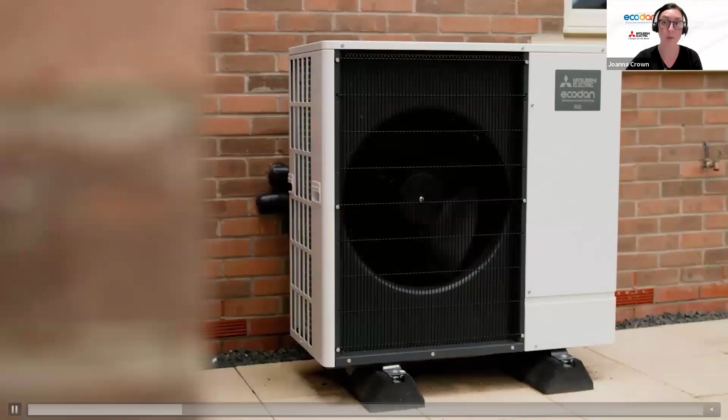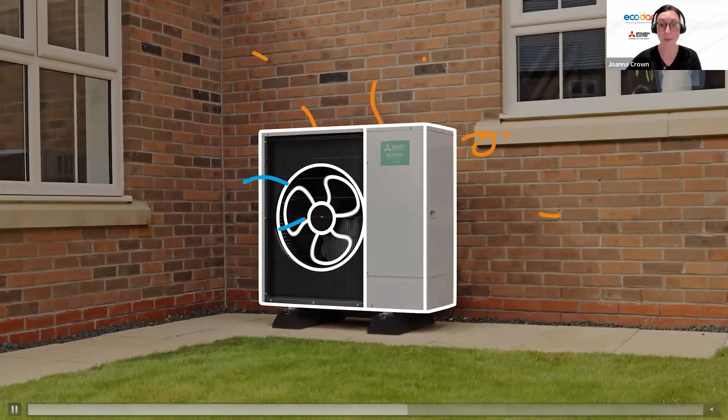This is a Mitsubishi Electric air source heat pump. The outdoor unit is typically located against an exterior wall of your home and only needs electricity and water connections to work. The outside air contains heat energy even when temperatures are super, super cold. The outside air is drawn into the back of the unit, by an electric fan where the heat energy is absorbed into a heat exchanger. Once absorbed, this heat energy is passed into your home to provide heating and hot water.

Once you have decided that you would like a heat pump, we have two excellent tools available for you to use. Firstly, the Find My Ecodan. You answer some simple questions about your home, and it will suggest the most suitable heat pump for you. It will also link you through to finding your local installer to contact for a survey and a quote, so for next steps. And if you also wanted to see what that heat pump looks like outside of your home, you can download our brand new augmented reality app, follow the instructions, and you will be able to see what that looks like outside your home, if you want to download it this evening.

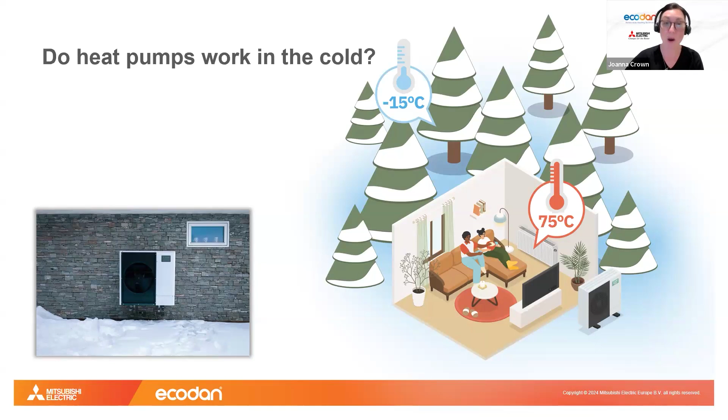Okay, a couple of common questions we get. Firstly, does it work in the cold? And the definite answer is yes. Our heat pumps will warm your radiators with a 75-degree flow temperature whilst it's -15 outside. All of our units actually work right the way down to -25. That photograph is Norway, just to prove that it does work in very, very cold climates. And I think Dunbartonshire's temperature lows for your area are around -8, so well within our heat pump operating range - you will have no concerns.

And the other question we get a lot is, are they noisy? No, not at all. Our units a metre away are just 40 decibels, and that is the sound of a library, so you will not hear them at all.

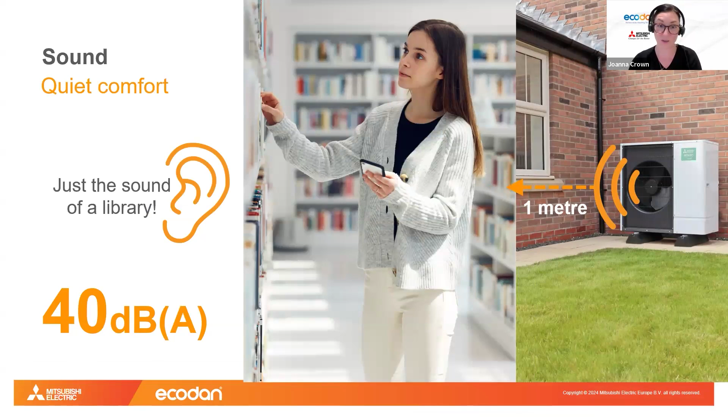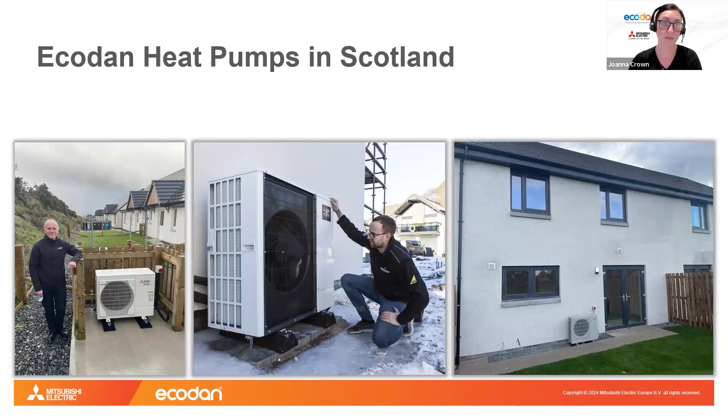And just to finish off, some examples of our Ecodan heat pumps in Scotland. I think the outside photos there are actually in the Hebrides, again, just to prove the point that they work in much colder climates as well.

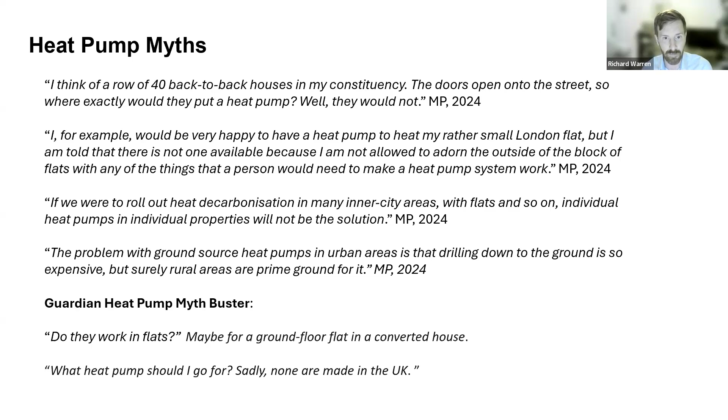So probably the easiest thing for me is to show a couple of examples of what we've done. But very briefly, Kensa - and I'm happy to say more and more companies are looking at this option - I came up with a process for putting ground source heat pumps into lots of properties all at the same time, going back about a decade.

It works fundamentally the same way that if you put a ground source heat pump in your own garden, you'd have a big borehole going down somewhere between 100 and 200 meters, and that would be your own borehole. The problem is it costs quite a lot of money up front, and most people don't necessarily want to pay that. Also, what we really want to do is put it into smaller properties where you don't have your own garden or that space.

So the concept of what we call networked heat pumps is, instead of having it in your garden, you'd have the boreholes in the car park around some flats, or in the street, for example in a row of terraced houses. Those boreholes go in the ground, but they wouldn't be your own boreholes - they'd be put in by a company like Kensa, and all of those boreholes would be connected together. Effectively, they'd be shared amongst all the flats or all the terraced houses, and they would all draw heat from the ground for you to use with your own ground source heat pump in your airing cupboard or the cupboard under the sink.

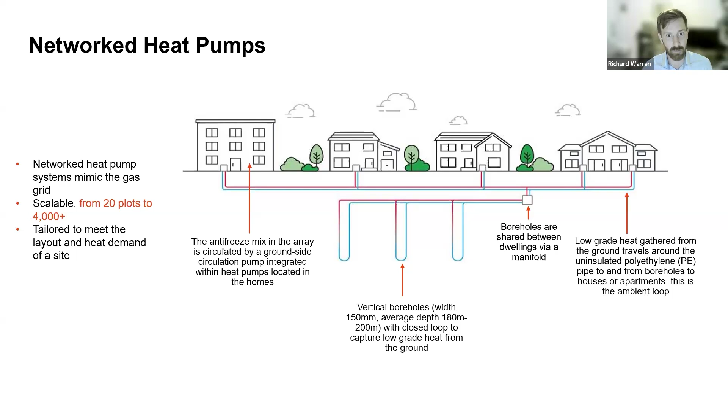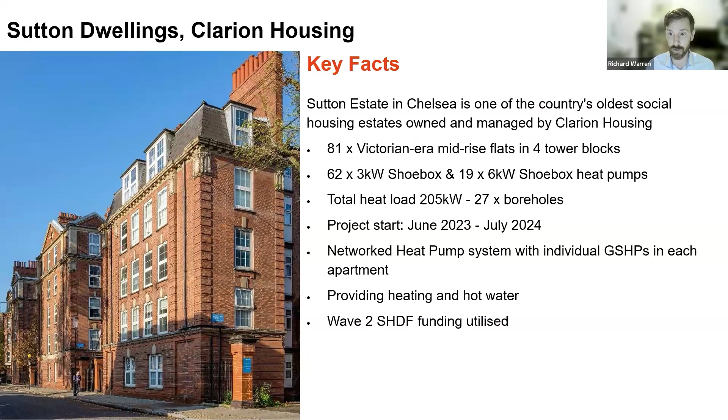So, a couple of examples where we've done this. The first one was Sutton Dwellings, owned and run by Clarion Housing, a housing association with properties all over the country. This one's right in the middle of Westminster, in Chelsea, and it's interesting because it busts a lot of myths. Firstly, we're putting ground source heat pumps into blocks of flats - we've done 81 flats, all with their own ground source heat pump providing heating and hot water. Secondly, these are some of the oldest social housing in the country, built just before the First World War, so we're busting the myth that you can't put a heat pump into historical properties.

The second example is slightly newer social housing - just over 270 flats in Thurrock, Essex, which we completed about a year ago. This shows you can have ground source heat pumps in blocks of flats with 10 stories, and these were really space constrained - a lot of them were even studio flats.

We're able to demonstrate a combination of a small ground source heat pump, which we call the shoebox. It's a little bit bigger than a shoebox, probably about the size of a large microwave. We're putting these ground source heat pumps in combined with a heat battery that allows you, even in a studio flat on the 10th floor of a block of flats, to have a ground source heat pump.

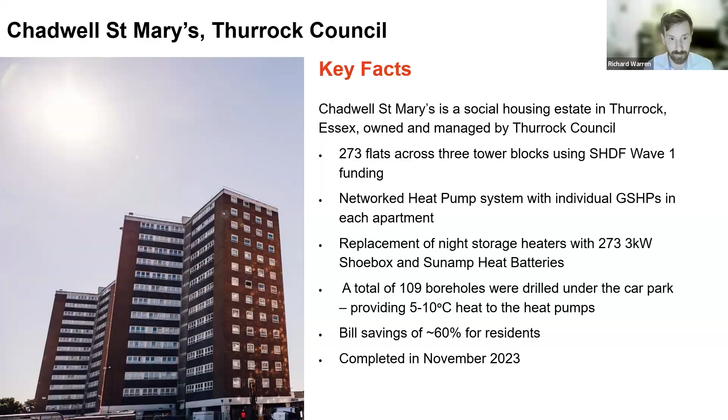I'll hand back to Eric. Thank you very much, thanks Richard. I love the social housing angle, because the size is another really big comment we get all the time. To see it on the last image, the way it's shown there, is really great to see. So thanks again for that.

I'll just give a little bit of information about the MCS Foundation and who we are and what we're about. Basically, if you're installing any heating technology in your home, you want to know that it's installed by really good engineers and it's really good equipment that's been certified, and it gives you that consumer confidence that it's going to work.

We know with gas boilers you've all seen the Gas Safe mark, a mark of quality for the installation. Well, for the renewable sector, that is MCS. MCS was started by the government during the feed-in tariff, when there were a number of issues in the market and they wanted quality, and it became the quality mark and standards mark for the government. We were novated out of government in 2018, so we're about 7 years old as independent from government, but at the same time we've been around for nearly 20 years. It's a standard mark, and it's a requirement of all government schemes, not only in Scotland but across the United Kingdom, if you're using a government grant or scheme, to make sure quality products are being put in.

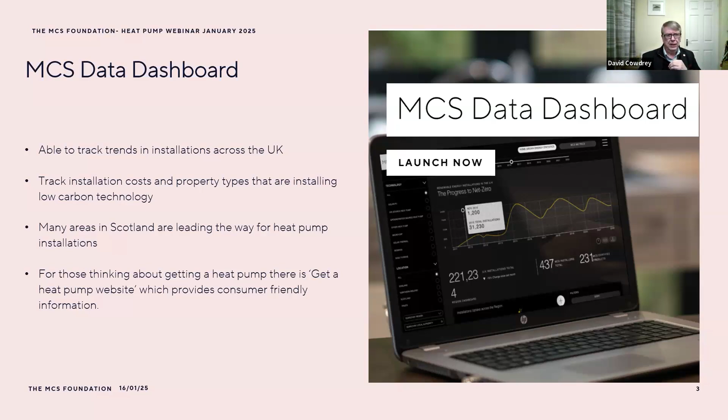As a foundation, we take a much wider view. It's not only about decarbonising homes, heat and energy. Our homes are 17%, but heating as a whole in the UK is nearly 30% of CO2 emissions. And when you look at the energy providing that heat, that needs to be decarbonised as well.

We need to start moving away from fossil fuels. We've been dependent on gas and oil, and it's been cheap, so we've not minded. But now we have a cost of living crisis, we really need to address it. We do research, we commission it to inform the policy debate, and to push back on solutions which other fossil fuel providers may think are good, but clearly are not. We need to challenge those misbeliefs and misconceptions out there.

The MCS mark is a quality mark. It underpins that renewable energy. If you can see the MCS certified standard, as part of Home Energy Scotland, if you get a grant, it's got to be an MCS certified product installed by an MCS certified installer. So you can go onto the site and find a local installer near you, which is the key thing.

So our vision, to finalise my comments, is that we want to make every UK home carbon free, but also it's the right choice to do. It's going to be cheaper, more cost effective, and provide long-term security. If you combine a heat pump with solar panels and battery storage, that combination of technologies will reduce bills substantially for homes. I won't go into our detailed research, but this is not only a great way of helping reduce carbon emissions, it's a great way of helping people potentially reduce their bills in the long term as we go forward. Thank you.